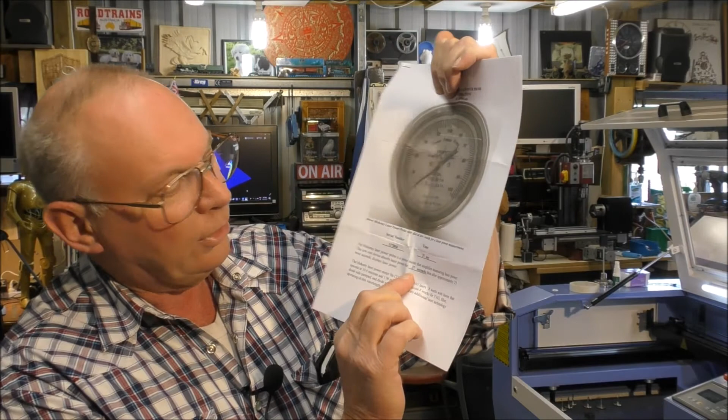In their printed article or explanation of how to use the meter, it clearly states and underlines in bold 37 seconds. Well, I did it for 37 seconds. Someone at the Mahoney factory, I think, got a bit confused.

At a 50% setting, sorry about all the scribble, my laser was putting out 93 watts. Obviously there was something wrong, unless I've got a 200 watt tube.

So then I reset. Actually what I did was I just drew a circle, first of all I think it was 12 millimeters in diameter. I'm not sure the exact figures, but it was roughly 12 millimeters in diameter, and a straight line through it.

When I laser cut, both were set on a cut, both of them set at 1 millimeter per second. And if you've got a circle with a diameter of 12 millimeters, it's roughly about 37 millimeters long.

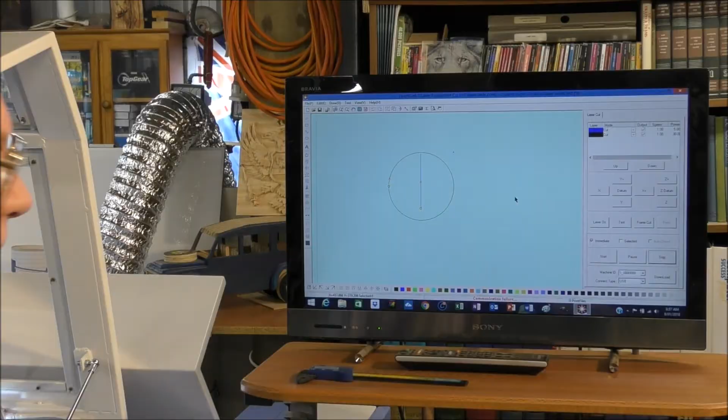So that gives you the correct time of exposure of laser time on, and the straight line through it. I'll show you now because it gets confusing trying to explain it otherwise. Okay, so this is what I'm trying to explain — roughly about 12 millimeters diameter, and you've got a straight line here.

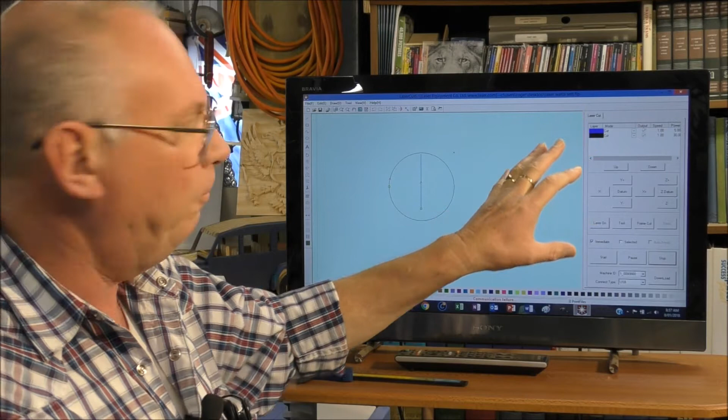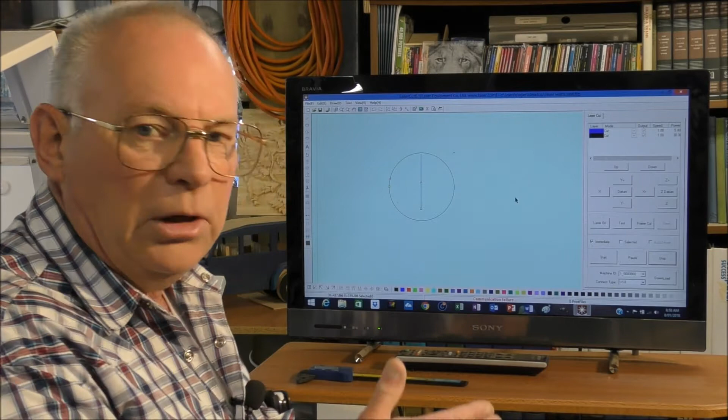The program is set up on two different layers, a blue layer and a black layer. Blue layer comes first. I know the laser won't fire at 5%, it fires around about 10%. So this is, I think, 10 millimeters long, and I've set the speed of cut to 1 millimeter a second, so that gives me 10 seconds to press start and get the Mahoney meter in line with wherever I want it, whether at the end of the laser, down near the head, or anywhere in between.

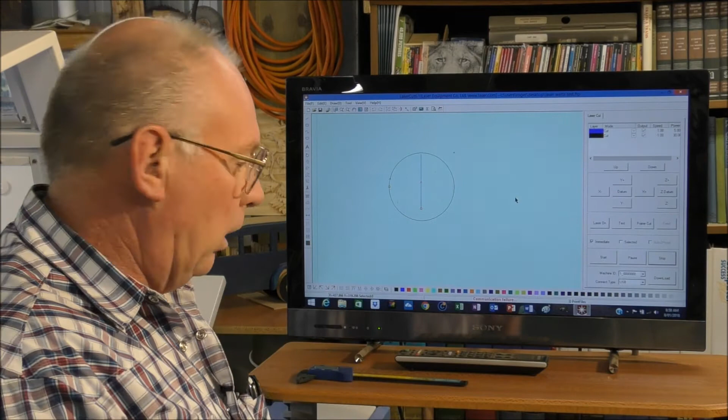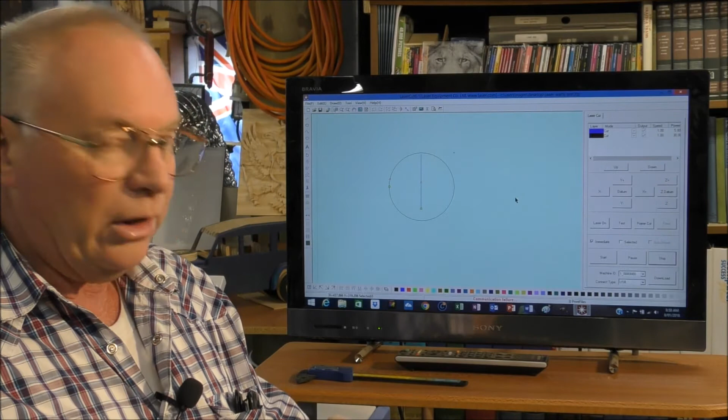Then it'll start after 10 seconds, giving me a measured 37 seconds of beam-on time, where you have to put the Mahoney meter, that black anodized aluminium block. You just play the beam on this, and the Mahoney meter measures how much heat is generated or picked up via this block, and it's within 1 or 2% — negligible, pretty accurate.

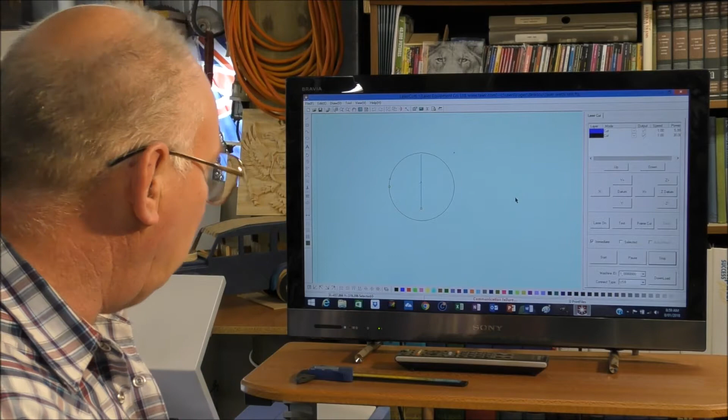So what I found out was the Mahoney meter was reading double what it should have been. So I immediately went back, no I don't want to save anything, and opened this up. Here we go.

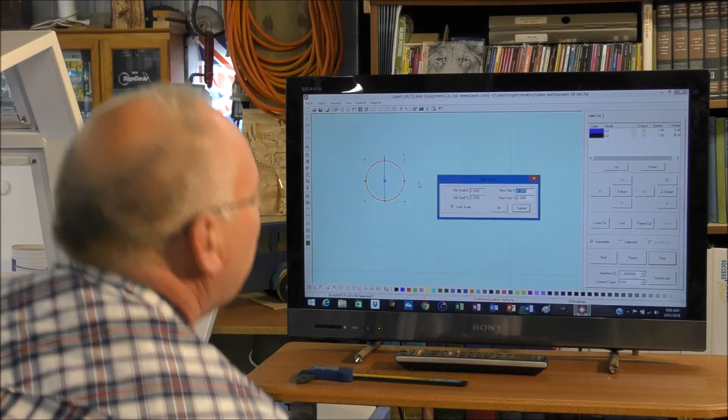This one is a much smaller measured amount, and you can of course trim the diameter of this circle to give you exactly 30 seconds of beam-on time. The way you trim it is highlight it and size, then alter the size. You got 9.2 millimeters in diameter, and that gives you exactly 30 seconds of beam-on time. So you're as accurate as you can be, and that's the easy way of doing it.

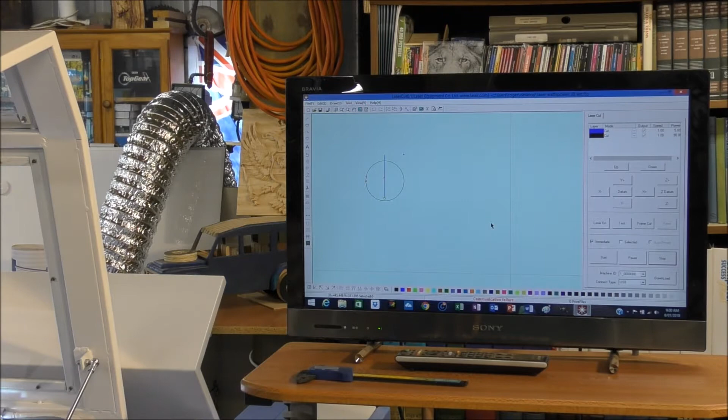So I found out that it is indeed a 30-second meter, not a 37-second meter, because immediately I altered the time beam on, I was starting to get more accurate readings out of it, but I noticed there was still something wrong.

For instance, I was expecting at say 50% to get somewhere in the region of about 60 watts, because I know it's not a linear power output. I'll get something and show you a little bit more accurately.

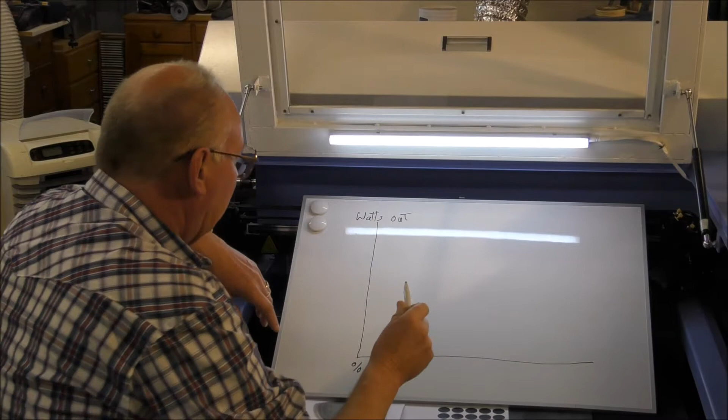So this is the situation with relationship to percentage power on the readout, or what you set it at, and the actual watts that comes out of the laser. It's not a linear relationship, it's something like this — it will jump up here. So you have 10 to 100 watts, with 50 in between. Sorry about my scribble.

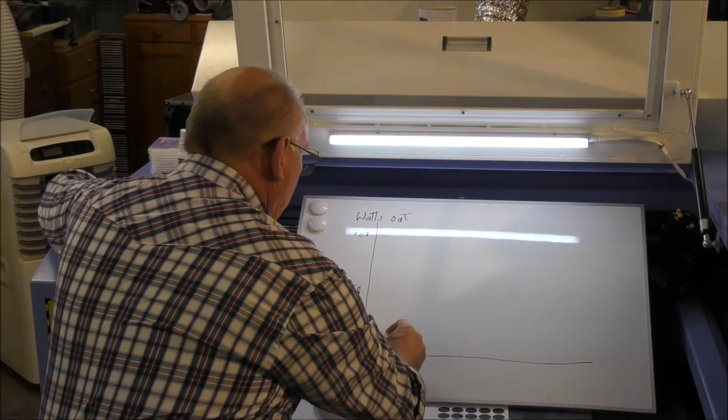The laser doesn't fire until 10 watts, which is about 10%. What happens then is you get a fairly steep rise like this, and then it tails off like this, and you get 100 watts there. So you can see it's not a linear affair.

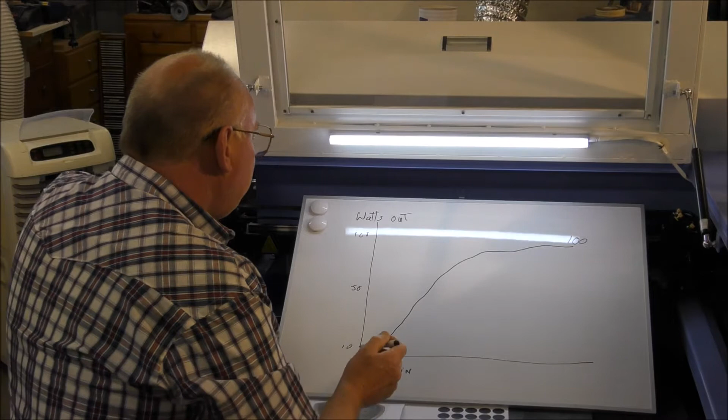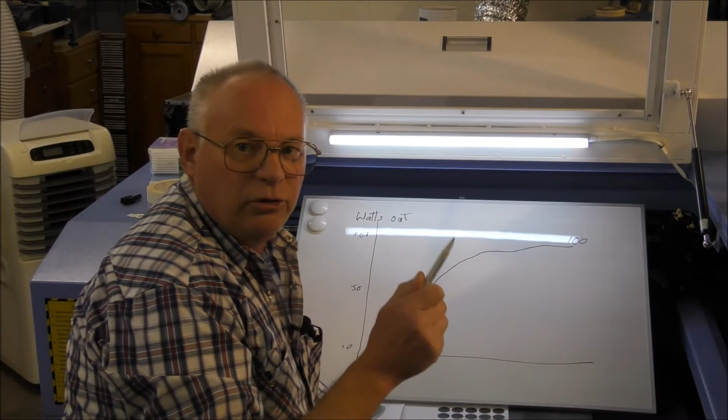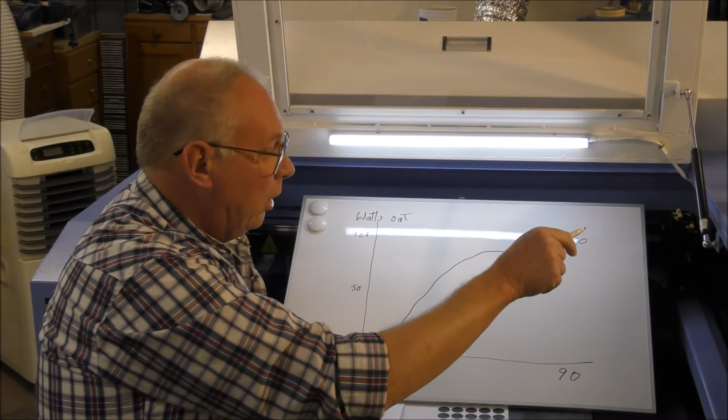In actual fact, what I found out yesterday was — I did suspect, and the engineers told me that generally at 85% output, the laser will be producing 100 watts. In actual fact, it's close, but it's actually 90%. At 90% on the percentage output setting, I proved to myself yesterday that it actually is producing 100 watts pretty well exactly at the end of the laser.

And that's another thing too with lasers — as the beam bounces around the machine through the mirrors, you get a certain percentage of loss of power through each mirror and the lens. So that's 1, 2, 3 — that's 4 areas where you are going to lose power. In general terms, you're going to lose between 3 and 5 watts by the time the laser reaches the material. Sometimes you can get it better than that if you keep your mirrors really clean and well aligned. That's something else we're going to maybe have time to do today.

Because also I found out that the mirrors aren't quite lined up, and I'm losing a little bit.

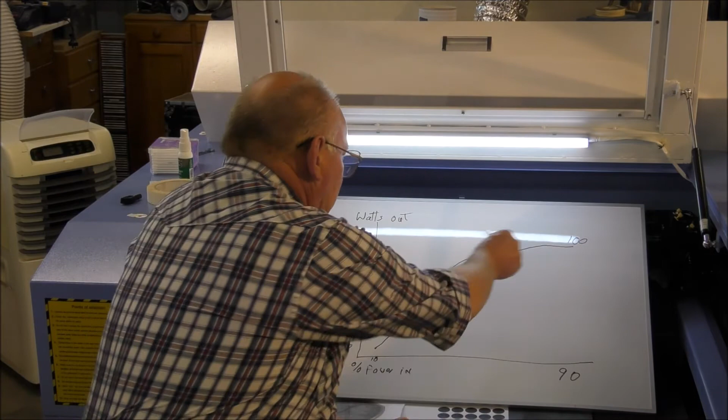I'm jumping around a little bit here, but I hope you understand that this is a rough example of the actual power output of the laser versus the set power in the program. It's not a linear affair. If you put in 50% output, you're going to get something like 70 watts or 65 watts. It's not linear - it's a fairly steep climb, then the climb gets less as you get up to the top end of the output. So I hope you understand that.

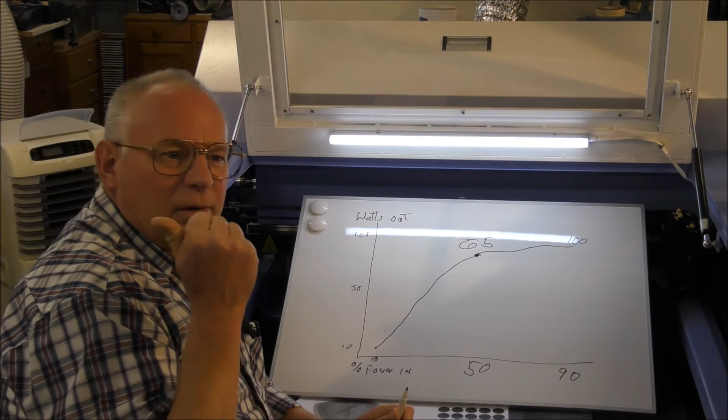Now this is at the head. Now the focusing lens just focuses the beam to a smaller beam, a more concentrated energy beam.

When it comes out of the end of the laser, it is actually 12 millimeters. I know in a lot of the manuals you'll see, oh, a 5 millimeter beam. Well, it's not. Whatever size the orifice is out of the end of the laser, that is the size of the beam. But don't forget, it's a Gaussian beam, so the extremity of the beam is weaker, and as it comes into the center of the beam, it gets more concentrated energy.

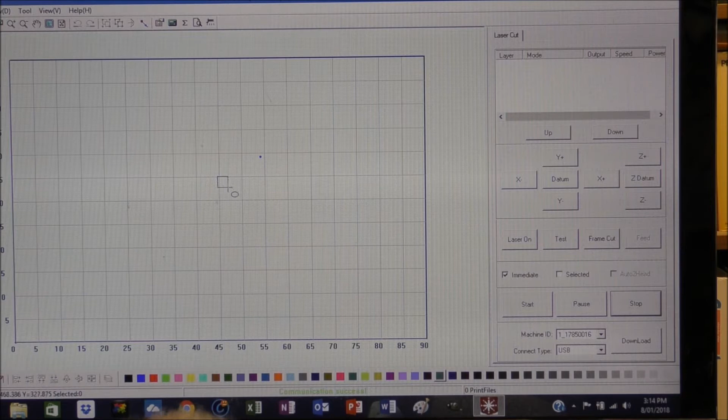Okay, so very quickly, all you need to do is get the circle tool, bring it in here, just draw any circle like that and zoom into it. That's a bit oval, but it really doesn't matter.

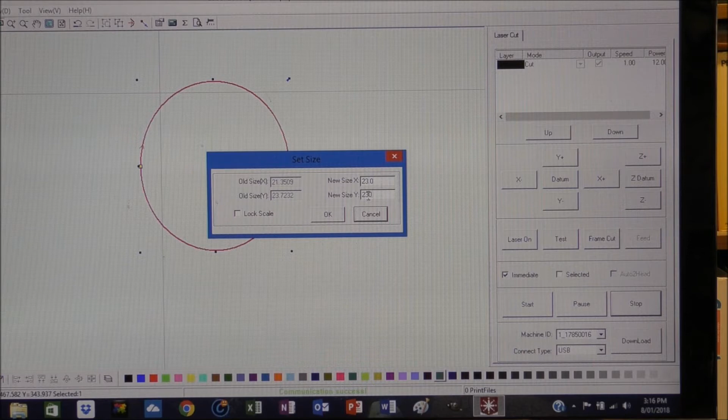Then come up here and get the highlight tool. So what you need to do is highlight, select size, untick this, and just put in here 23.0mm and 23.0 - oh, a little bit far over there, 0.0, and press OK.

So that now is a 23mm diameter circle, but we want quite a few of them. So what I'm going to do is come here and say I want 5 rows this way, 3 rows that way, and we better have them 3mm gap in each direction, and we press OK, and there they are.

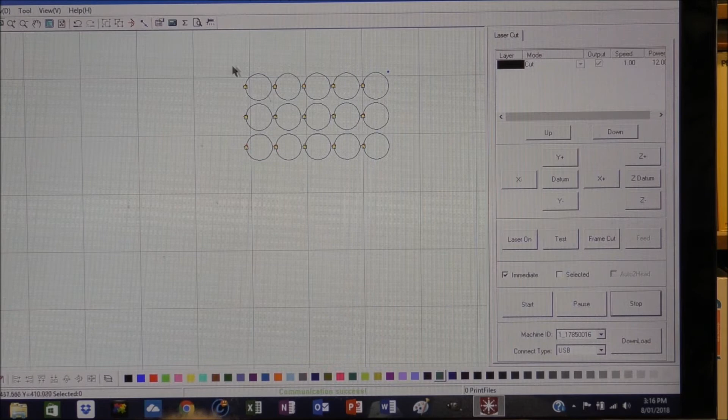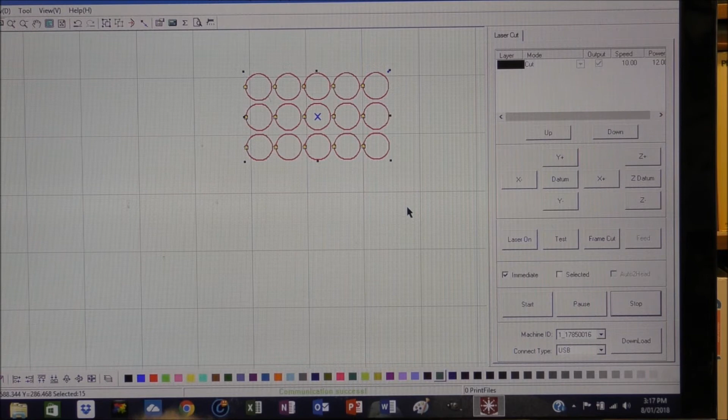So we select them all, and we want to cut, so we come here - 1mm is a bit slow, so we're going to go 10mm a second, 12, that's okay to cut that card, and press OK. Now we'll just send that file to our laser and we'll cut them.

Okay, so you get your piece of card. You will need to put magnets just on it like this. These are fairly weak magnets just to hold the card there, because the blower from the jet will actually just blow the paper out of the way.

And indeed, when you're cutting the discs out, what I do is I follow the laser around, and as the laser is nearly finished, I just put my pen on it. Otherwise the air blowing nozzle will blow it underneath where the laser is, and it's going to cut what you don't want.

Simply, I'm using the keypad now to move the head in the right position. We'll just automatically zero the Z now.

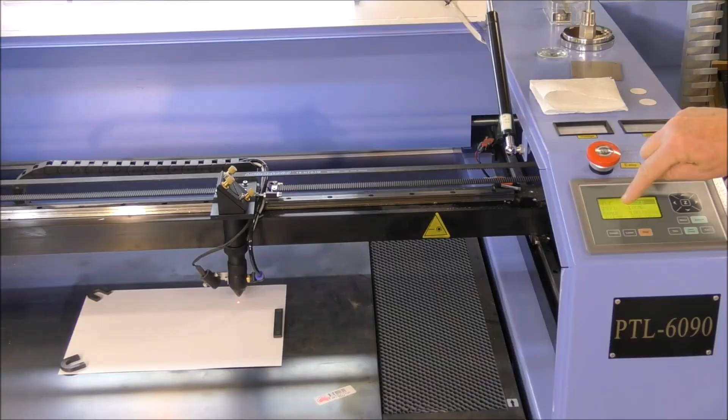I just want to show you this. The program is in, and this is highlighted, the program is highlighted, but you can't move the head around. You must take that off highlighted, then you can move this around.

Okay, so I want to set that as the datum. Okay, now that's set as a datum. Now we'll do a test. Okay, that's where it's going to cut it. And now we can press start.

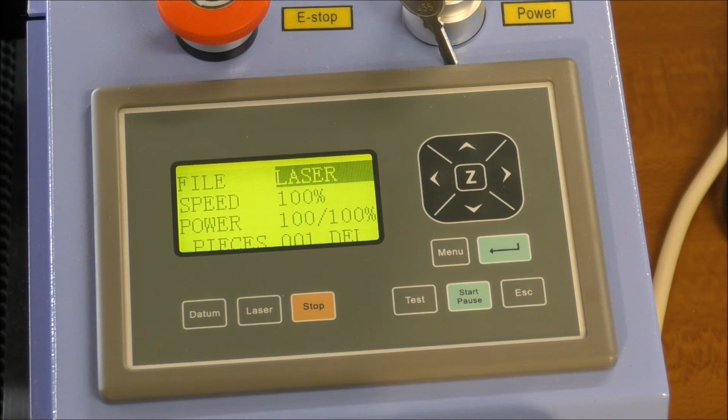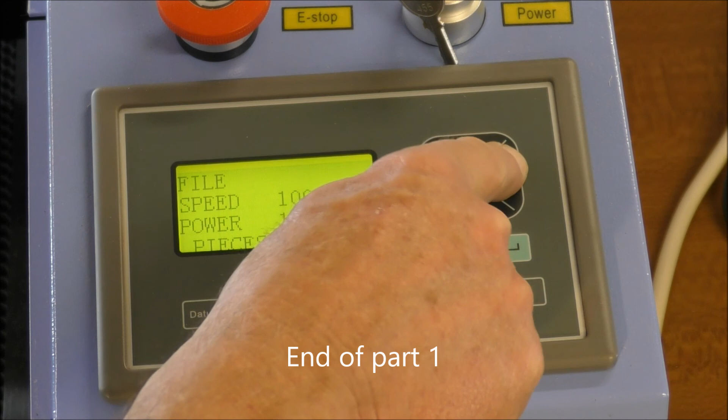To remove a file from this control unit, you just simply highlight like this, press that to delete, and press that, and it deletes the file in the memory. You can't move the control, or rather you cannot move the head until you unhighlight that. Then you can move the head.